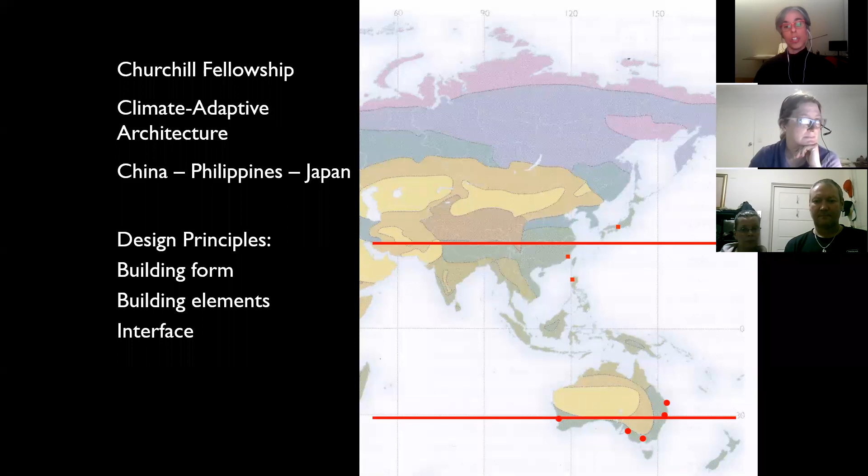So I chose these places also because they have very long histories of urban settlements and have regularly been impacted by events such as high rainfall, flooding, high winds, monsoons, heat waves, and other climate calamities. We're going to look at 3 design principles: building form, building elements, and interface. And we're going to look specifically at design solutions that didn't rely on technology.

Our first stop is in China, and we're going to be looking at building form. And what was interesting during my travels is that everywhere I went, I saw courtyard buildings. And this was fascinating because the courtyard building is actually a Persian invention. So Persia, old Iran, it's a Middle Eastern invention. It was designed for a hot and arid desert climate.

The courtyard or enclosed garden is also a spiritual idea. It's where we derive our word paradise. So what I saw is that the courtyard building has actually been adapted to suit almost every climate zone in the world. Courtyards are a way of organizing space.

The courtyard is essentially an outdoor room that's located inside a building, and it gives access to the outside to all the spaces around it. So every single room has got a kind of connection to the outdoors. It also creates layers of privacy.

So as you move from the street into the house, you would have kind of more public rooms, a more public courtyard, and then more and more private spaces until you get to the rear where perhaps the master of the house and his wife would be living. So, you know, this is in traditional society.

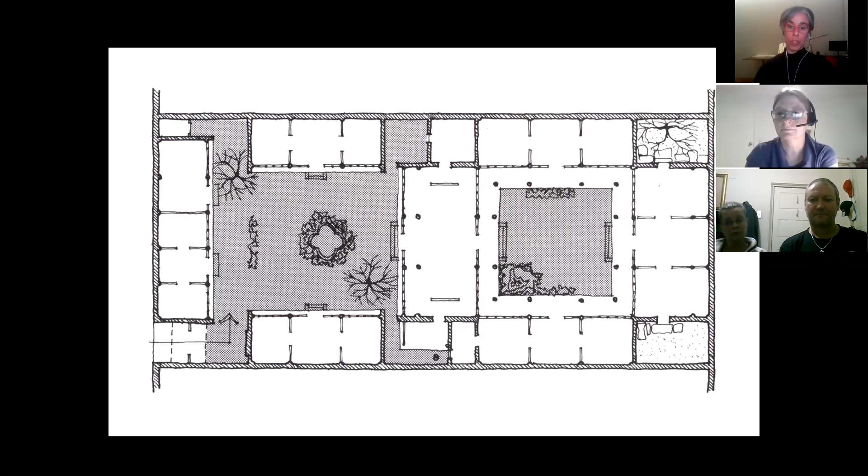So for example, in this merchant's house, which was under renovation, there are multiple courtyards. The one closest to the street, which is the one you see here, would act as essentially a public space. This is where guests and visitors would have been received, and people who you would not normally want to invite into the more private areas of your house. This is also where noisier or messier activities could take place without causing disturbance to the rest of the household.

You have to remember that traditionally, and even today, households in China were multi-generational, so there would have been quite a number of people living in a large house like this one.

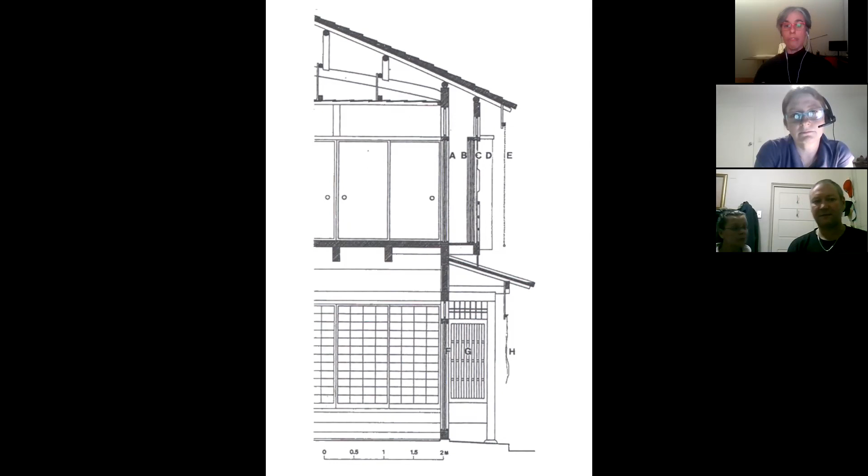Typical of Japanese ingenuity, they have accommodated many elements in a small area. So all the letters that you see in this drawing are basically movable and changeable building elements. They allow the occupants to adjust the building to the sun, heat, rain, wind, privacy, and security in multiple combinations. So it's really clever design, compact, and specific to places where you don't have a lot of space available to do these sorts of things.

Our final stop is in Vigan. Vigan is a Spanish colonial town in the northern part of the Philippines, where traditional buildings of timber and bamboo were adapted by the Spanish with their own traditions of brick and stone. The prevailing climate here is primarily one of heat and humidity, large rainfalls, and again, typhoons, and also they are subject to earthquakes. So the buildings kind of had to take all of these things into account to last as long as they have lasted.

Typical of Spanish colonial buildings, the outer walls are right on the boundary of the property, and basically the buildings form the street edge and the public spaces. Particular to Spanish buildings in the Philippines, they incorporate very specific solutions to interface with the climate that we don't see in other places where the Spanish colonized.

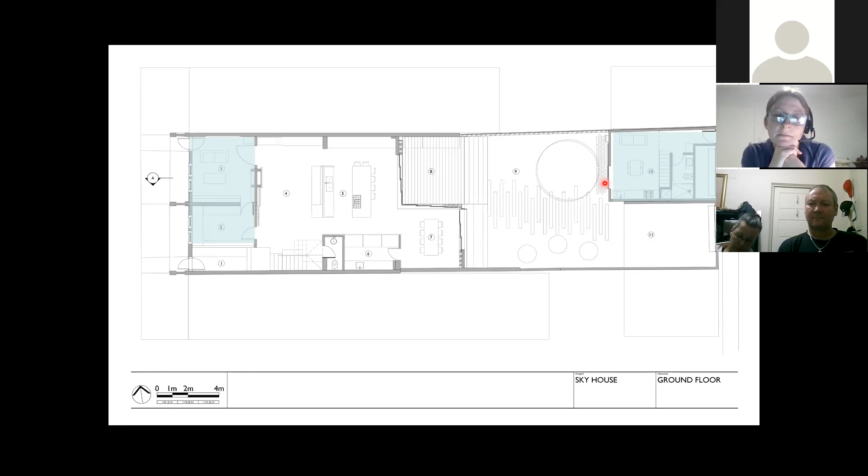The rear studio can be accessed either from the laneway or from the rear yard. So it could potentially be used by a member of the household, say like a university-aged child or a grandparent, so that you could have multi-generational living in this house, or it could be completely separated and rented out for additional income for a period of time. So as I mentioned, the front rooms are more traditional in their proportion and character.

They can be used in flexible ways, either closed off from or combined with the main living areas. The two rooms are interconnected, so they could work together as a large office or study area, for example, or they can be completely separated from each other, and each room then functions independently. So you could have one as a home office, the other one as a library, TV room, or as a guest room. Whatever the needs of the family are at a particular time could be accommodated.

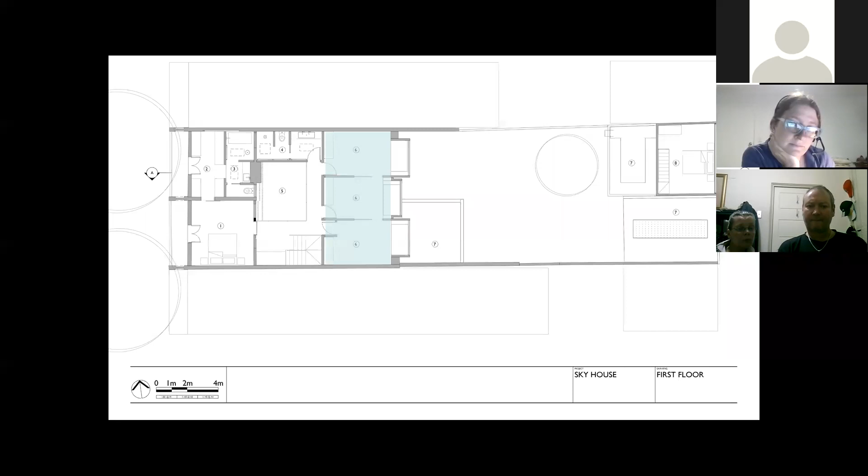On the first floor, the children's rooms are designed as a series of spaces that can be configured as 3 individual rooms, as a 1+2 combination, or as one large space. For example, if the kids are all getting along with each other, they can have the doors open and they can share one large space. Or if they have friends, family for a sleepover, you know, you could have 10 kids sleeping on the floor and they would all be having a great time.

On a daily basis, as the kids get older, and they are going to be wanting more privacy from each other, then they can decide to separate the rooms via the large sliding walls that come along those two sides. Because the rooms are quite narrow, the beds are built as window niches, so that keeps the floor free for play or for adding a study desk and other furniture as the kids get older.

Within the bed niche, each child can adjust the environment to suit themselves. And we think that this is important, that children learn how to use buildings and that they learn how to make themselves comfortable within buildings. So each one of the bed niches has got an operable window, and it also has a series of internal screens that the kids can manipulate themselves.

A unique aspect of this house is the internal atrium over the living space. So going back to that idea of the courtyard, in this particular case, it has sort of been reconfigured as an internal atrium. The atrium works to modulate climate year round. It incorporates movable elements so that the building can adapt to the climate.

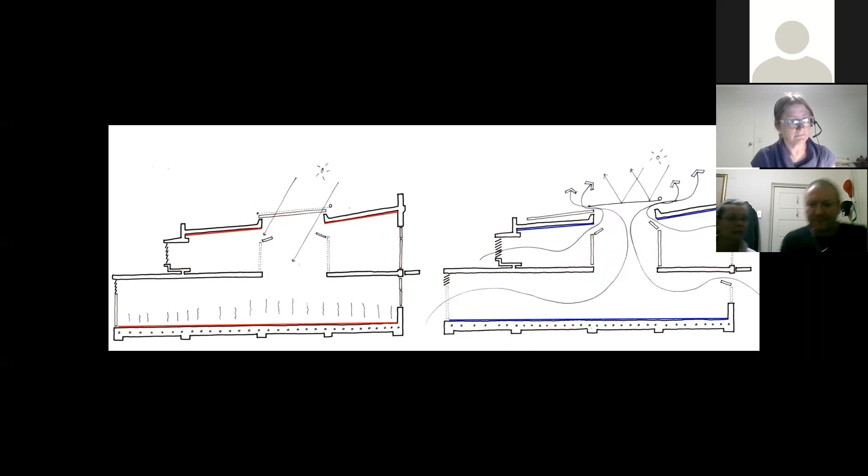The other aspect of the atrium is that it brings light into what would normally be the darkest area in a terrace house. There are two elements within the atrium that move independently: the sky window and the shading screen above it. So the space can be manipulated to go from completely enclosed to partially open, partially shaded, unshaded, to completely open. It controls light, shade, heat, and airflow. But more importantly, it connects the building and the people in it with nature, the sunshine, clouds, the starry night.

I want to take a couple of seconds to make a little announcement here, because I know that there are people who worked with us on this project who are attending this presentation. So if you'll all indulge me for a second, I just found out a couple of hours ago that this house has been shortlisted for the National Sustainability Awards. So I just want to say congratulations to the whole team and well done.

This next project is a typical workers' cottage in the inner west. It's a much smaller building type. It's a house for a retired couple. So they obviously spent lots of time at home before all of us were forced to do the same. And I'm sure many of you will relate when I say that social dynamics, not getting in each other's space and being able to do different activities at the same time were really important considerations for this couple.

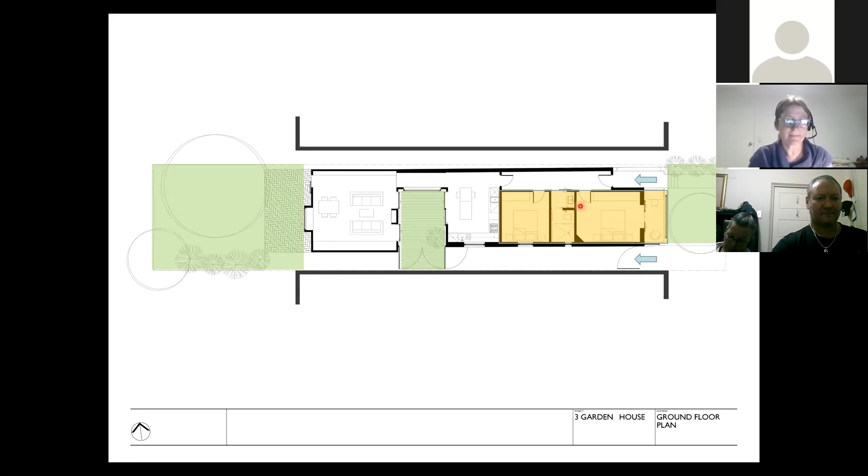This is a house that's organized around 3 gardens and 2 entry points, with the original bedrooms and the private areas retained towards the front of the house, and then the new living, kitchen and dining towards the rear, each with its own garden outlook. The rear garden had a couple of existing mature trees, which were obviously retained, and then they become the backdrop for the living areas. So from inside the living spaces, you are always surrounded by greenery, whether you're looking outwards or up through any of the openings, your view is always to something that is green and natural.

Looking in the other direction, you're connected to the courtyard. So there's still light and effective ventilation coming into that space, and you would also have a view to the sky. The courtyard is what connects the old and the new, and it has a dynamic element that allows adaptation over the days and over the seasons.

The courtyard also serves as a secondary entry. So for example, if you had guests coming and you didn't have time to tidy up your bedrooms and you don't want people walking past them, you can ask them to come through the side entry, and that becomes like the party entry.

This also makes the house accessible because there's a ramp from the side passageway up to the courtyard level. And once you're up at this level, you're basically at the level of the house, and there are no steps internally. So that's a really important consideration when people are thinking about aging in place, and you have different mobility requirements as you get older.

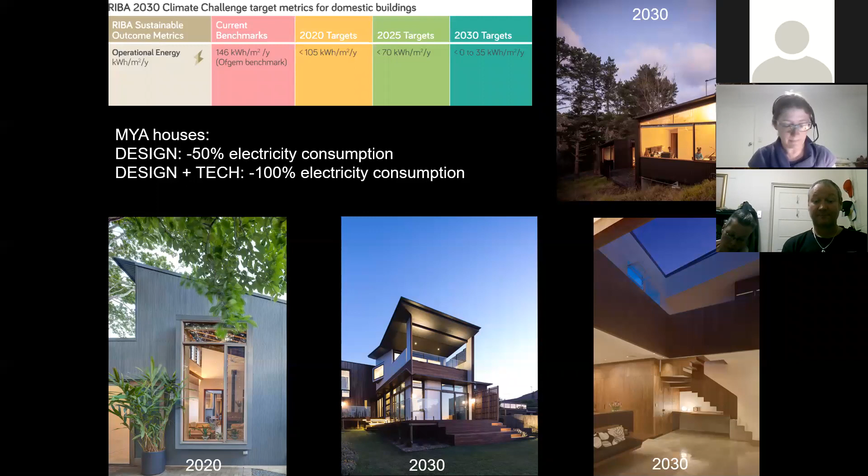And as you can see, what we're trying to do is move from a current benchmark, which is quite high, to something that is approximating zero or is very low energy consumption for any given size of house. And the other thing that I'll point out is you can see many of our houses already meet that 2030 metric. So it's clearly something that's within our reach to be able to build places like this. It's not as hard as it looks.

So what is required? How do we get there? As usual, the first thing is probably a mind shift. We have to think a little bit different than we're used to. We have to think about sustainability in a more comprehensive way so that it includes both people and nature, and it gives them equal emphasis. So not people over nature or the other way around even, but an equal emphasis of people and nature and understanding that relationship.

We have to incorporate flexibility and adaptability to mitigate how climate is changing and how our own lives change over time. We have to create an effortless experience for the inhabitants. So it should just be really simple and really easy to live in a house that uses these sorts of techniques. We have to integrate technology with design to achieve those high efficiencies. They go together, it's not one or the other.

And finally, and perhaps most importantly, we have to consider buildings in relation with people and in relation with their environment. So not looking at buildings as static objects that we look at, but buildings as dynamic systems that can last the test of time.